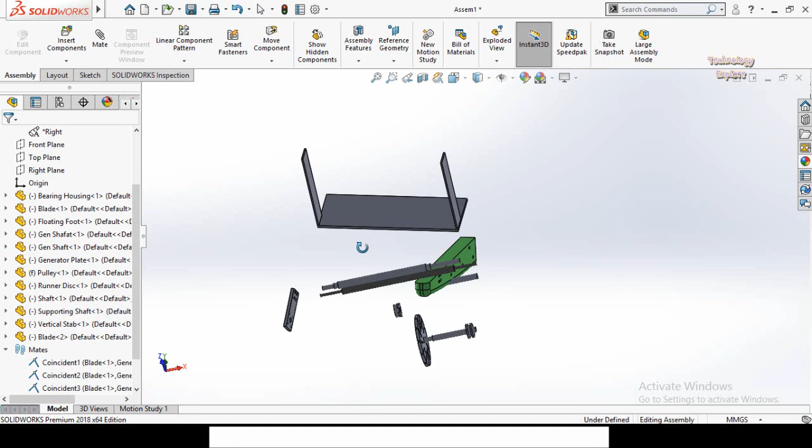For example, I am going to make this shaft in the middle of both these components. So for that, click on Mate, then scroll down and from here select Advanced Mates.

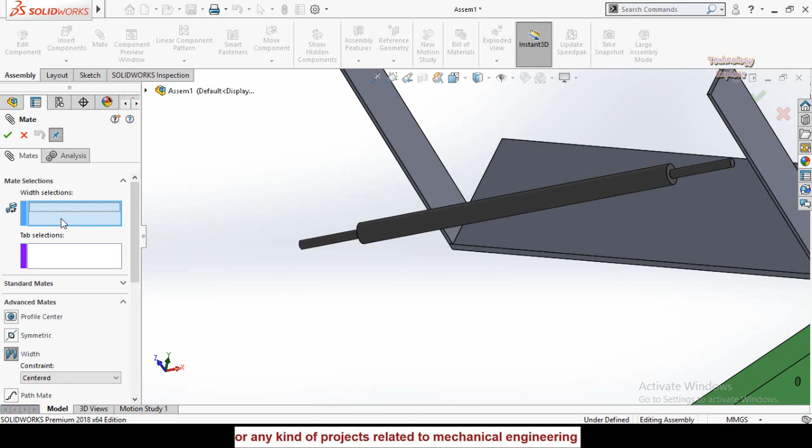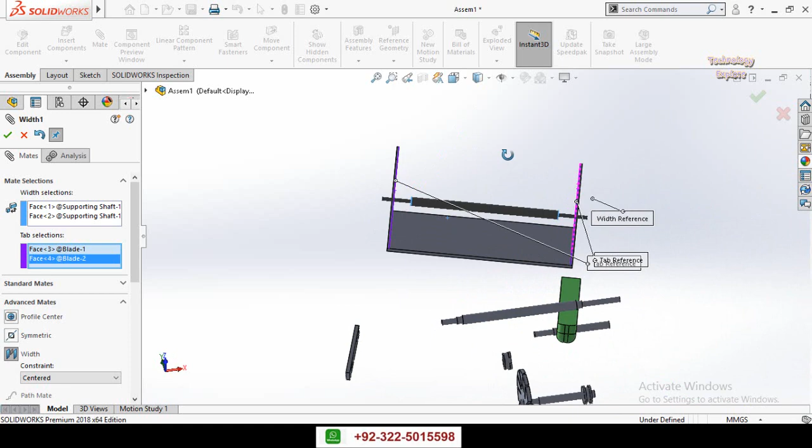In the advanced mates, select Width. Then you will see these width selection options, so you can select this face or this face. I'm going to select this face and this face, then select this face and this face. Now you can see this shaft is adjusted or assembled in the middle of both these plates.

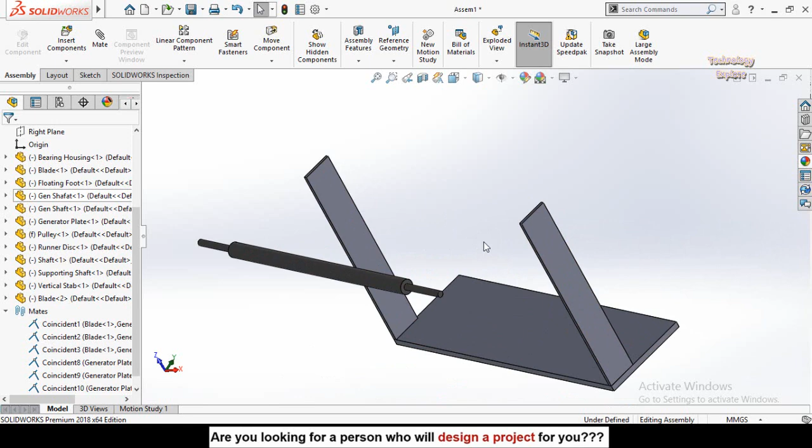Now press the OK button. So this was the width mate, and there is another option in SolidWorks to create the width mate. Before going to that option, let me show you one more thing, that you can also edit the parts in the SolidWorks assemblies.

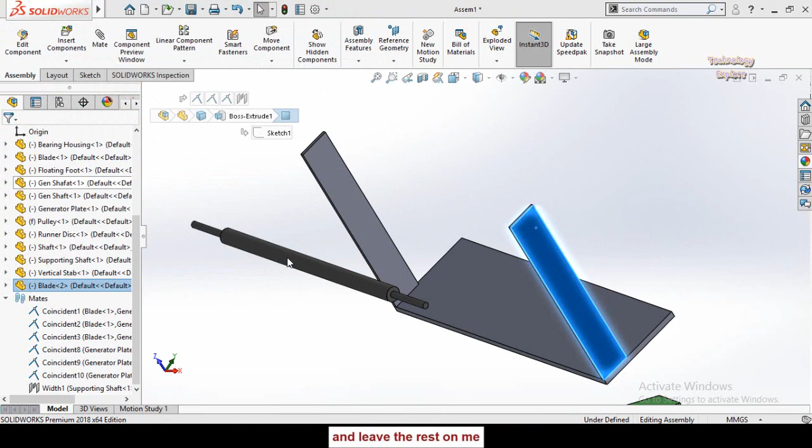For that, click on the desired part that you want to edit, then select Edit Part from here. The system will ask you to save the assembly and then continue, so save and continue, then specify the location and save it. Now you can see we had saved the assembly, and from here you can see the component editing mode is turned on. Now I'm going to make a hole on this face.

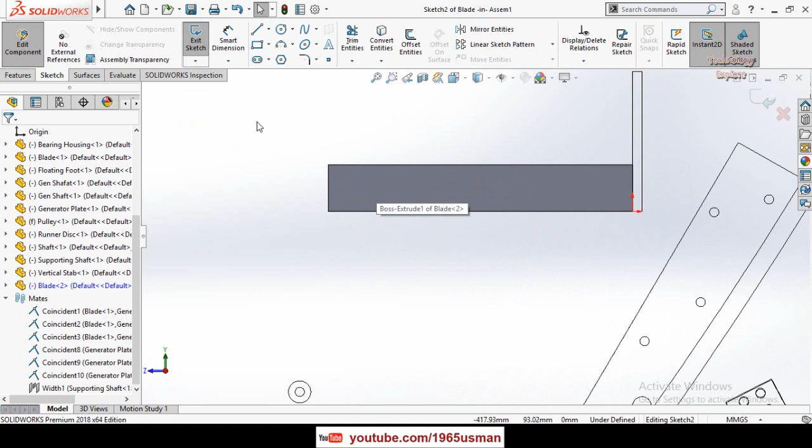Select this face, then from here select Sketch. Make it normal to by pressing Ctrl+8 on your keyboard. Then draw a circle like this, and press the Escape button.

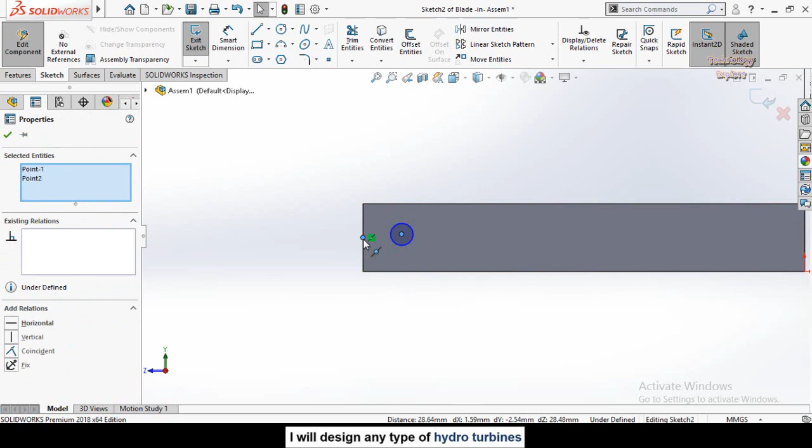Now if you want to make this hole in the middle of both these lines, select this midpoint or center point and press and hold the Control key, then select this midpoint. Release the Control key and then from here select Make Horizontal.

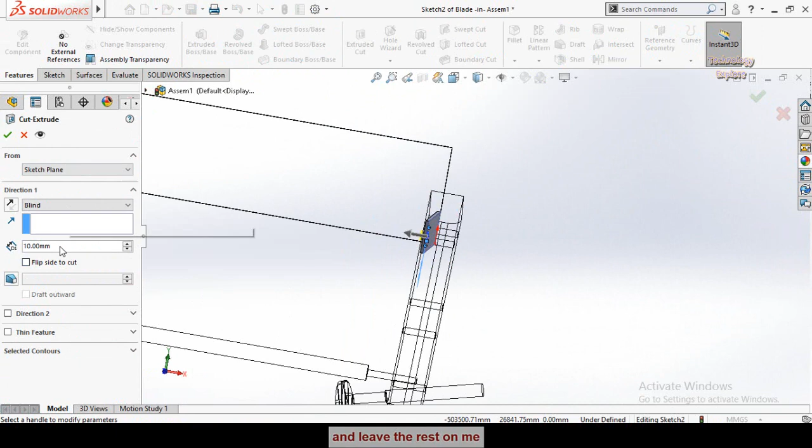Now you can also define this diameter, so define it. Then go to the Features tab and from here select Extrude Cut. Specify the extrusion length and then press the OK button.

Now if you had done the part editing, click on this button, the part editing mode button, to save this part. So now we are back in the assembly mode.

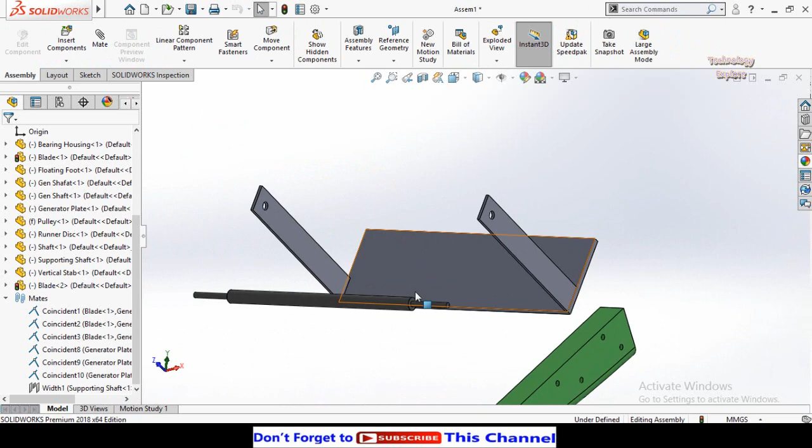Now click on this face, the cylindrical face of the shaft, then select Mate, and at the moment I am going to make the concentric mate with this hole. Press OK button. Now again press OK button.

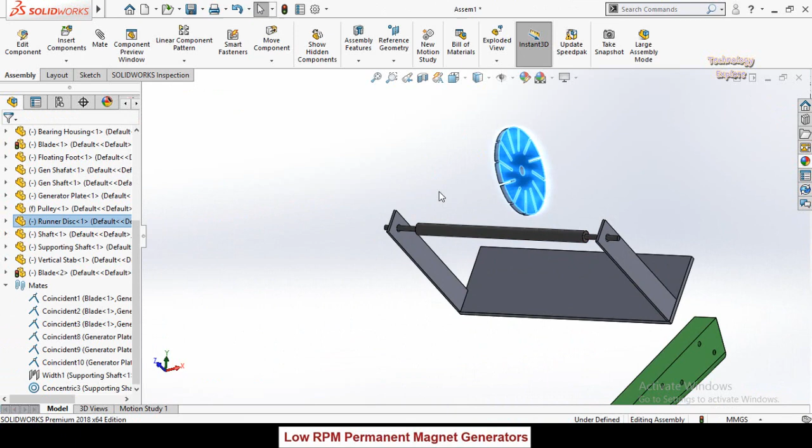Now I'm going to tell you how to create the width mate by using another way. It is very simple and easy.